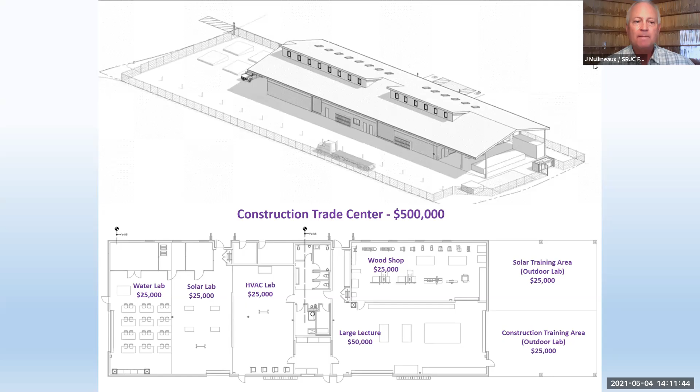And I think that's really all that I have today. Yeah.

So this is an action item on the agenda. We are asking for the BFC to make a motion, and they would move it to the board agenda next Tuesday. I hear a motion. So move that we accept the naming opportunities for the Petaluma Campus, Shone Farm, and Construction Trade Center, or however it should read. And a second.

Where'd Jeff go? Did he have to go to his phone call? I'm sorry, I had muted. Yeah, I second. Thanks, Jeff.

All right, all in favor? Aye. Opposed? Motion carries. Congratulations. Thank you, Jay. Appreciate it. Thank you so much.

Okay, Seraphin, you want to keep us up to date? Yes, we'll go into the capital project updates. Let me see, can you see my screen? Yes. Okay, let me see if I can get it in. Okay, here we go.

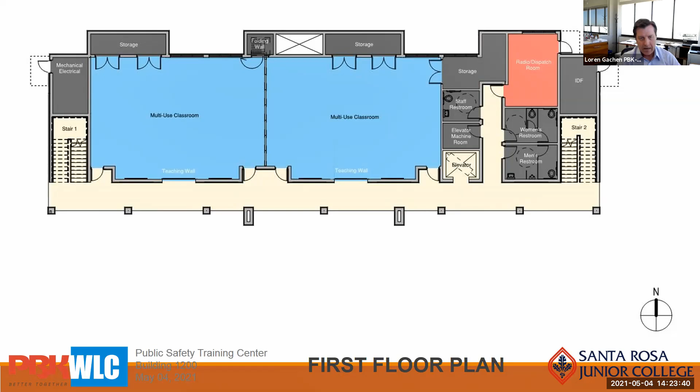If we go to the next slide, I'll show you the second floor. The committee desired to have the same setup on the second floor with the classrooms, so we have the identical features we just discussed on the first floor.

You'll also see there's no shortage of storage. That was another aspect that was asked for - to make sure there was ample storage. So we've definitely incorporated that into the floor plan.

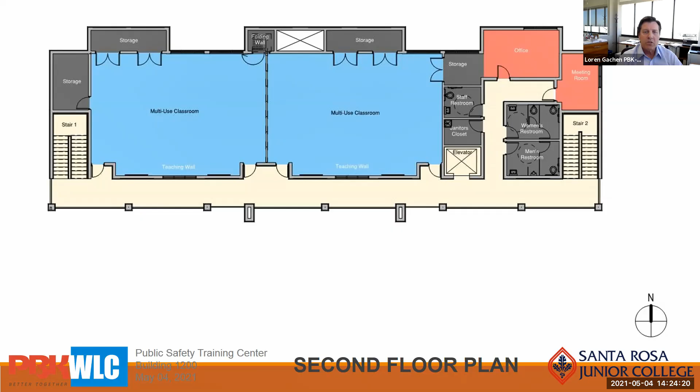Elsewhere on the building, there was a desire for an office, so we've introduced an office and also a meeting room. That pretty much makes up the floor plan aspects of this building. If we go on to the next slide.

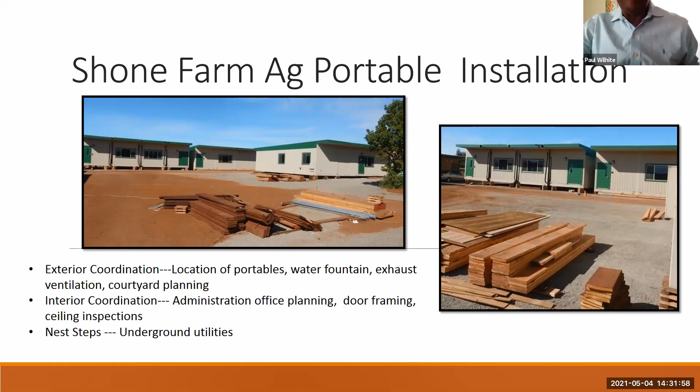Just following up, you've been seeing this for several months. We're continuing the barn improvements. The roof was completed last month, the exterior painting completed, and the interior corral improvements are ongoing. On the produce processing center, the building had been delayed, but arrived last Thursday, and they've already got part of it up, so that's moving along well.

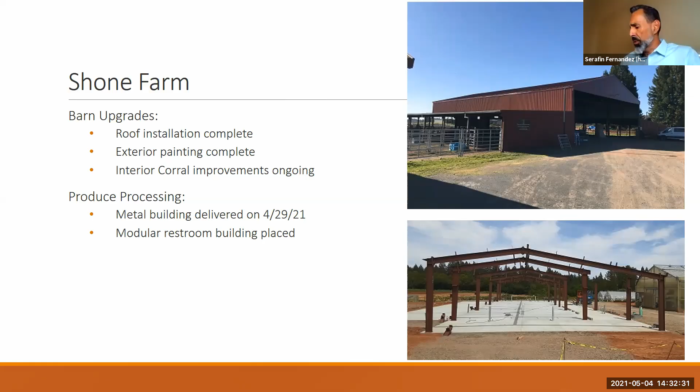Okay, we'll stay with Scott, moving over to the Santa Rosa campus, central plant project.

The non-potable water tank foundation is in the right lower picture. That was placed last Thursday, and that's for a storage tank that will reclaim water that we were dumping into the storm drains for years. That'll now be used for irrigation and restroom fixture flushing.

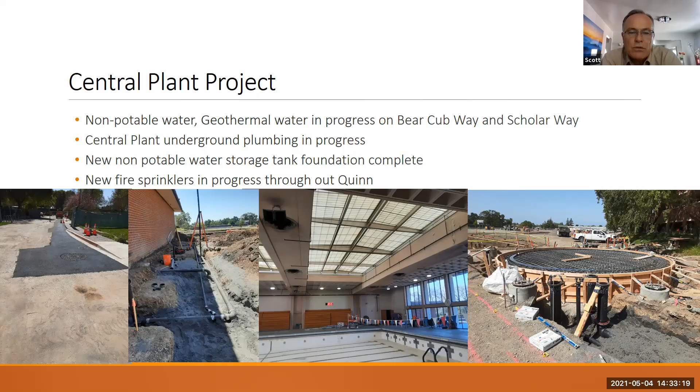We're also working on the underground plumbing for the central plant itself, and the fire sprinklers are ongoing in the gymnasium, excuse me, the pool, indoor pool, and the locker rooms.

The Emeritus Circle improvements are largely complete. Sidewalks are complete, landscaping complete. The only thing we're missing right now are handrails on the ADA ramp that you can see on the left. As soon as that's in, we'll have the notice of completion to you, hopefully next month.

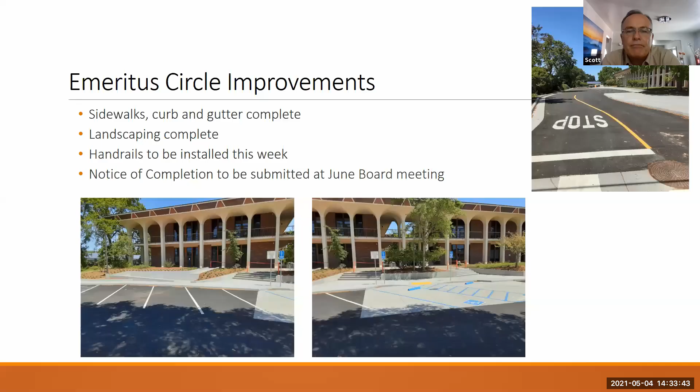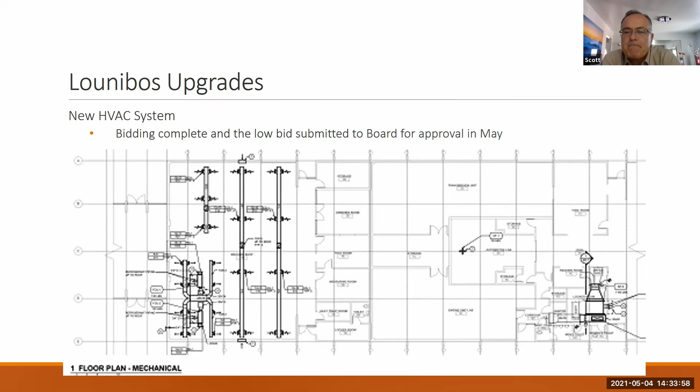Also in Lounibos, we are improving the welding shop through a grant, putting in new welding booths and exhaust ducting, and repainting and freshening up the space.

Similarly in the auto shop, we're updating through a strong workforce grant, new car lifts. There will be 6 new lifts to replace the above ground lifts. These will be in-ground, and we're getting 2 new 4-post above ground lifts. So they will have a total of 10, 8 of them will be new.

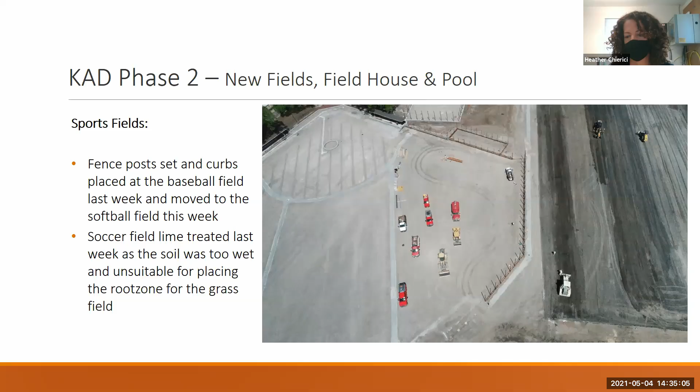They lime treated it last week because we were having soil pumping issues, and we needed to solve that. Over at the field house south of Bailey Field, they are forming the curbs and getting ready to put in rebar for the slab, and they'll pour the slab before the end of the month.

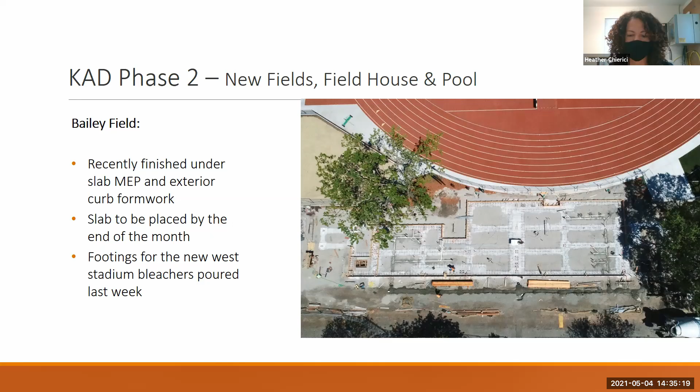We've also, I don't have a photo of it, but we're also working on the stadium footings at Bailey Field as well. For the new outdoor pool, you can see the photo there. The pool is almost completely excavated, and we're also working on the pool support building. We dug for footings and we're getting ready to place rebar there.

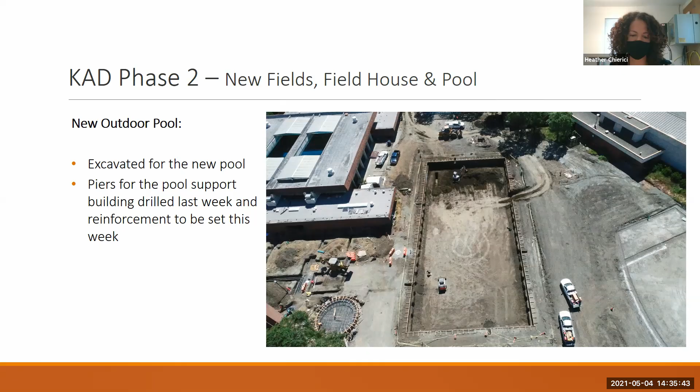And then for Tauzer, design development is complete. I expect to get the design development estimate by next week. We're still waiting on the state. We followed up with the state and are waiting to hear back so that we can hopefully start later this month on the working drawings and submit to DSA in August.

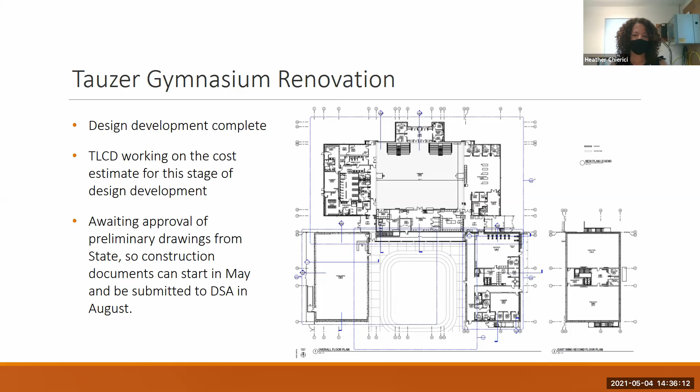Yes, good afternoon. The campus-wide security project's final design has been completed. We've received DSA approval for the Windsor and Petaluma campuses. Santa Rosa campus is in DSA review now. The design build contractor is working to finalize the GMP. Once we get DSA approval, we'll present that immediately for approval, and the project is scheduled for completion in May 2022.

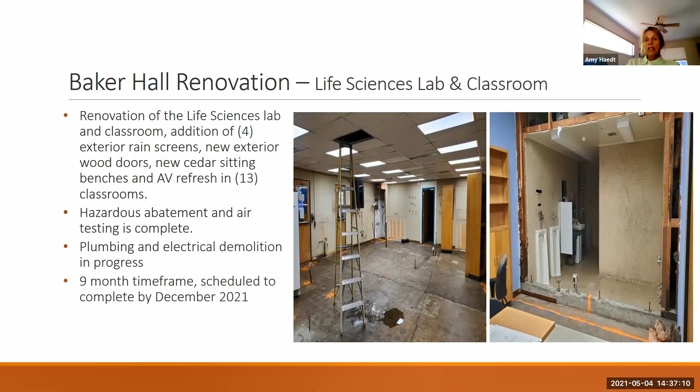You can see some of the renderings of the animal shapes that we're going to be installing, and also new canopies to protect the new doors.

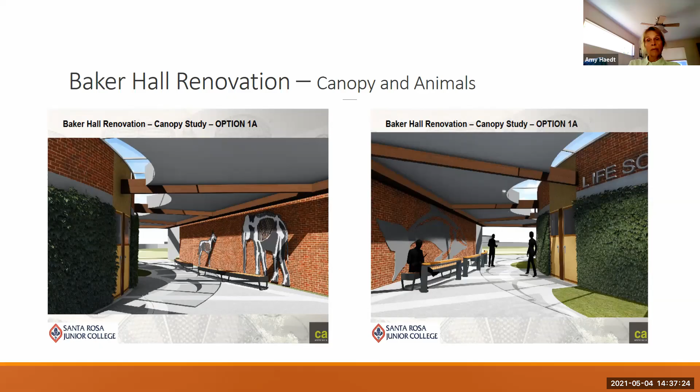The Pioneer Hall ICC tenant improvement is complete except for one small change order that needs to be done. It has all new floors, new carpet in the offices, new ceiling, new LED lighting. The space really popped when we finished it, and the users are very happy with it. I hope to file the NOC for the June board approval.

Bertolini Student Health Services is a consolidation from Race and Plover Halls to Bertolini 3rd floor, which is currently the CalWorks space. The renovation will include minor demo to the reception area and ceilings, addition of 2 health services offices, and a fresh paint and upgrade.

We have DSA approval. The project is going to be bidding May 25th. We're in process of relocating the 2nd and 3rd floors, and I have tentative board approval set for June with a 6-month time frame for construction.

707 Elliott Foundation, we are very close to getting CGS sign off. We already have DSA approval. I have the demolition of the existing building scheduled for May 10th. We will immediately go into purchasing for bidding of this project once we secure CGS approval, and I have a tentative start date of mid-July 2021 with an 11-month construction period.

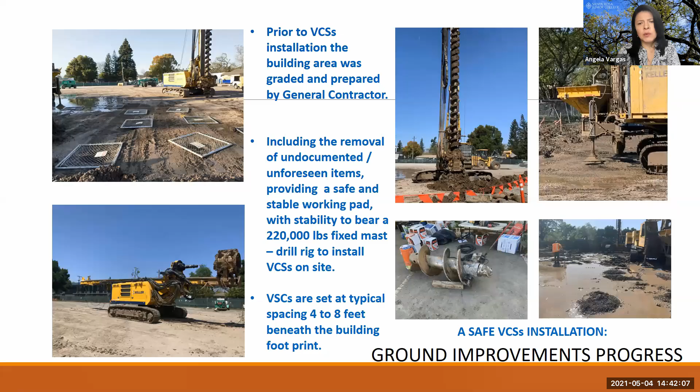Next slide. We can see here also the alternate one. We are moving with the construction of phase 1 of alternate 1. Alternate 1 is an improvement of Scholars Lane, and we divide this into phases for convenience of the construction process and coordination with other projects around us.

We are moving with abatement. We have to remove asbestos and lead minimum amounts, but they were found in the concrete and in the paintings, and we are doing our best in moving through the process with safety for the construction process. That's all for now. Thank you, Angela.

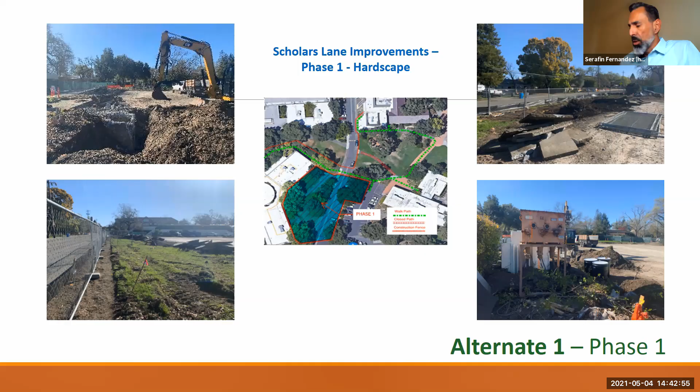Finally, we have 5 items on the board agenda for you to approve next week. We mentioned the Lunabis Mechanical Improvement Project, the construction contract to Gecko Inc. We have change order number 2 for the ICC. This is a final change order that will bring us to a total change order percentage of just a little bit over 8%. We have an amendment to the designer for the Baker Hall lab renovation. This is amendment 1 at $19,000, primarily to address issues that DSA brought up.

At the Petaluma Student Life Project, this is final change order number 16 for Midstate Construction, which will bring us to 9.93% of total change orders for the project. And then the Public Safety Training Center expansion, CEQA notice of exemption, also for your approval. That concludes my report, unless you have any questions for us.

Thank you, Serafin, and your team. Is there any questions from anybody? No, it's good, it's a great report. You guys really have shown us everything. That was awesome, a lot of work going on.